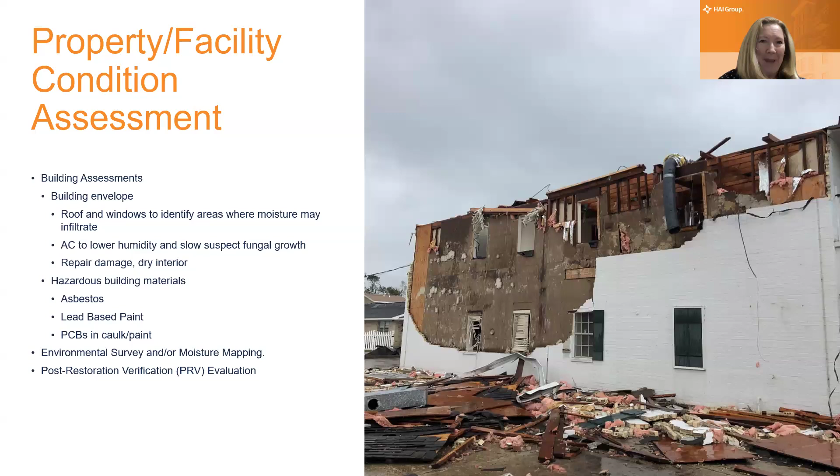So if we could go to the next slide, let's talk a little bit about what we're looking for. So in our building condition assessment or our facility condition assessment, we're first doing a visual assessment. We're going to walk through the whole building and observe. Again, we're looking for areas where perhaps moisture might be getting into the building. And this could be something that's just based on age, based on deterioration. It could also be due to a storm event, right? So we want to be cognizant of that. And perhaps we need to do a visual assessment after a significant storm event.

We've had an unprecedented hurricane season, for example, in Florida. So should your property be in the path of hurricane damage or high winds or some of these other types of environmental and storm related conditions, then you would want to do a visual assessment after the storm has passed and understand if there is any damage and if any repairs need to be made.

And so we would walk the exterior. We're looking for evidence of any ponding or standing water. We're looking for water that's accumulated at all. If it's getting close to the foundation, then we have concerns it might be infiltrating into the basement of the building, as an example. We'd want to look at any heavy vegetation growth.

Where I live, we have a lot of old trees, and so there's a concern, especially in storm events. These trees have come down, they've hit the roof, they've broken windows, those kinds of things. So we want to make sure we're cognizant of that. And if there's heavy vegetation around the foundation of the building, a lot of times, again, that traps moisture and starts to infiltrate into the basement and get into the building.

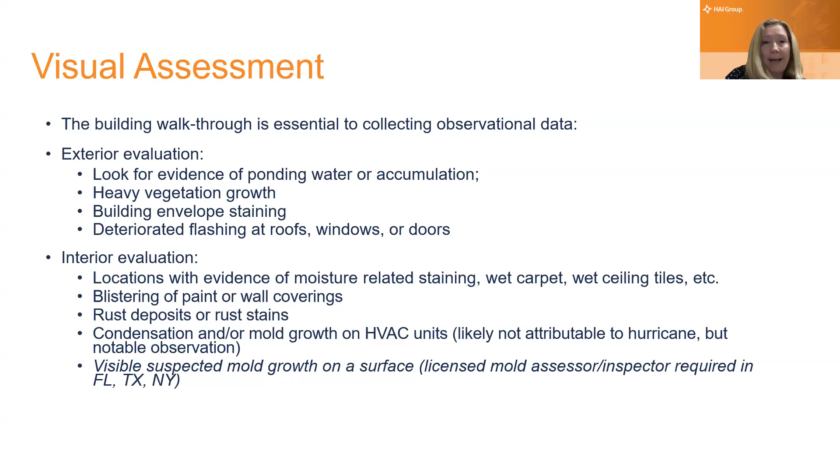And I just have a quick note here. Certain states do have specific licensure requirements, and we want to make sure that we're cognizant of that, and that if you're bringing in a specialty contractor, that they have the appropriate licensure. This would be another place for you to keep good documentation. You want to make sure that you have that information, and that is part of the report that they provide to you. You might ask for it as part of, say, a proposal, that you want evidence of the appropriate licensure. And similarly for asbestos-related work and lead paint work as well.

We know some commercial building owners set their HVAC equipment to cease operations, say overnight or weekend hours or something like that, maybe more so in an office setting or a manufacturing setting versus a residential setting. But that does happen. And so there might be different reasons why we change the HVAC equipment settings for different hours of the day. But also, more importantly, as we were talking about a moment ago, should there be a storm event, should we lose power, then our HVAC equipment is no longer working.

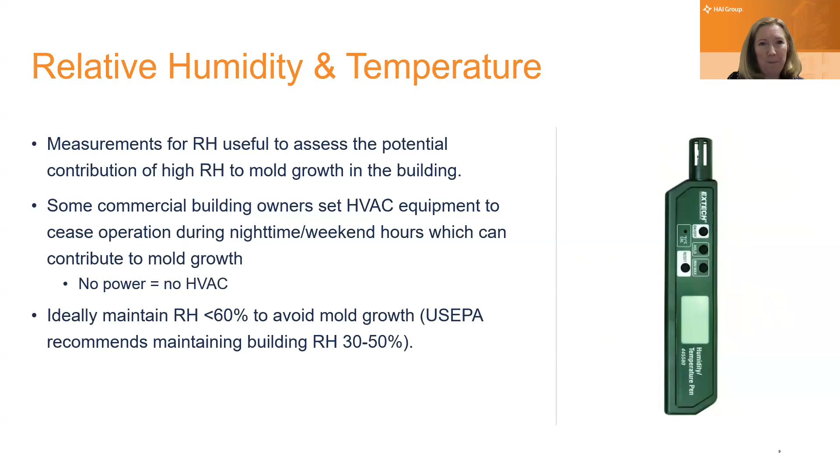Thank you so much. Another handheld device that we use is a moisture meter. Sometimes you'll hear it called a wood moisture equivalent or material specific meter. And this is a way for us, again, to look at the interior building materials and say, are the building materials soaking up moisture that they're collecting from the air, from storm events, that kind of thing.

So a lot of times, facility maintenance staff might have and operate one of these handheld devices, keep it on hand and utilize it if there's been a storm event, if there's been a power outage, if there's been a reason to think that maybe the HVAC isn't performing optimally.

So they're all a little bit different, but they essentially are looking to help us gauge moisture in building materials. And so you might need to calibrate it before you use it. They come with pretty easy to follow instructions. But the idea is to separate out any moisture in wood products where we know it can grow, but then also other materials, for example, like wallboard, the surfacing material that's so common in many of our apartments.

There's different ways to use this, but it's a quick survey, a quick gauge to give us an indication of what's the moisture condition beneath that immediate surface of the building materials. And it can be very precise, and we can make it specific to our area. And so we'll talk in a minute about how we gather this data, and then we put it in our moisture map.

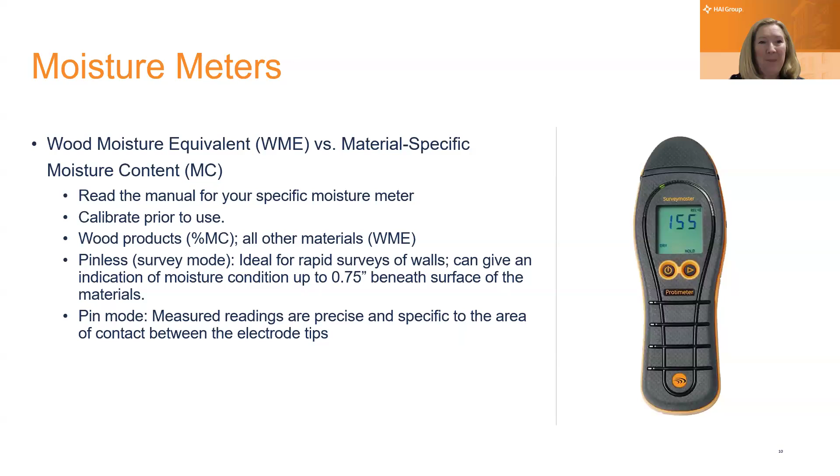We could go to the next slide, please. Great. So here's our moisture map. So we want to determine how far water has spread both horizontally and vertically, and to what extent those materials are wet. To what degree are they holding moisture?

It is a good visual tool for the client, whoever we're trying to convey this information to. At least I know in my house, I have a couple of visual learners. It makes a big difference, I think, to be able to see the representation. How far has this water spread throughout the building, horizontally, vertically? So on the floor, up the walls, maybe coming in from the roof, down the walls. Maybe if a pipe has burst, it's following the trail of that pipe throughout the building.

So we want to use that visual tool, and then gathering all this information, this moisture map can be used as part of a remediation plan should there need to be building materials that are removed from the property and properly disposed and then replaced. So it's, again, a great visual tool, and it helps us look at those building materials and to calculate and establish a remediation plan and the costs associated with doing that work.

Your floor plan could be hand-drawn. It doesn't have to be fancy. I'm going to show you a quick example of a CAD digitized version, but certainly it can be a sketch of the property, whatever's going to work for you, just to convey how far vertically and horizontally that moisture has spread throughout the building.

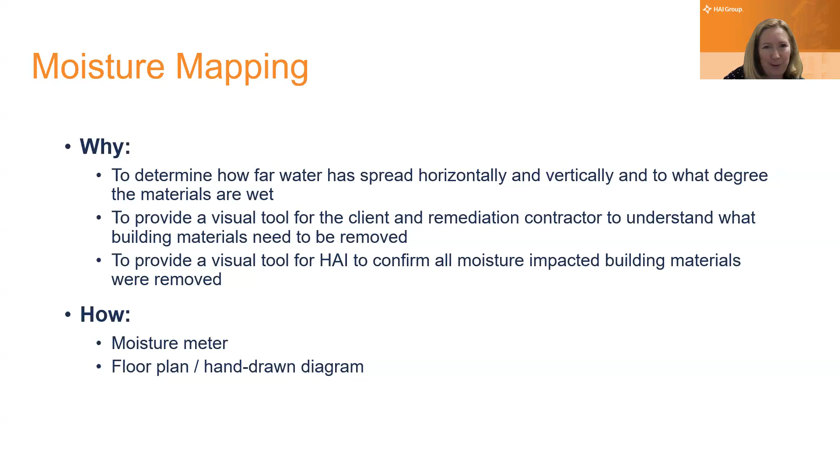Next slide, please. Great. So again, oftentimes this moisture intrusion is due to envelope leaks, as we talked about at the beginning. Is it coming in through the roof, through the windows, through the doorways, but also, again, from storm events. If it's a wind-driven rain, then we might see it start to come through exterior surfaces of the wall. So we want to be sensitive to that, if there's actual structural damage to the wall, or if maybe the flashing was not correctly installed.

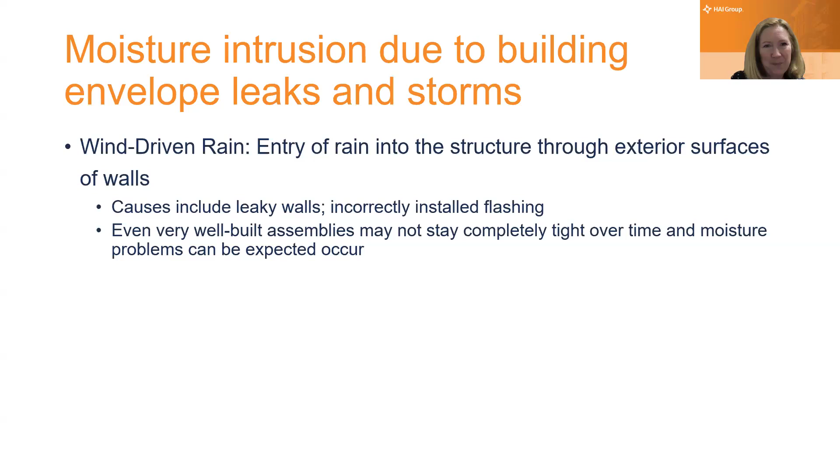Next slide, please. So let's just do a broad background. Again, I know we have a broad audience here, so I want to touch on some more things related to mold, as well as asbestos-containing building materials and lead paint, and give you some visuals of the kind of things that we'd be looking for.

So more about mold, we know that mold spores are ubiquitous. They're found indoors, they're found outdoors. Sometimes you'll hear people refer to it as a fungus. The exposure to mold is unavoidable because, of course, it's a natural process. But to the extent possible in a residential setting, in a multifamily setting, we want to try to minimize human exposure where we can to mold. And although we know that they're present outdoors and indoors, on the interior surfaces we have more concern about that. And so there's lots of different standards and guidelines that we can use, but there's no regulatory standard for mold exposure.

I personally am a very allergic person to mold. So if I walk into a building, I almost immediately react. My eyes water. I start to feel that itchy, scratchy throat, allergic feeling. But other people don't. And so that's also something that's a little bit tricky, that different people respond differently to mold growth. I feel it right away, but other people don't. So I guess that's maybe part of the reason why we don't have a regulatory standard, but we do use ANSI guidelines and others.

We just want to be careful where we can to minimize it. We know we can't eliminate all of it. It certainly grows sometimes in our bathrooms, below the kitchen sink, that kind of thing. But to the extent possible, we want to try to minimize it and mitigate it. If it gets out of control, if it's a proliferation of mold growth, then we really know we have a bigger issue, a bigger concern.

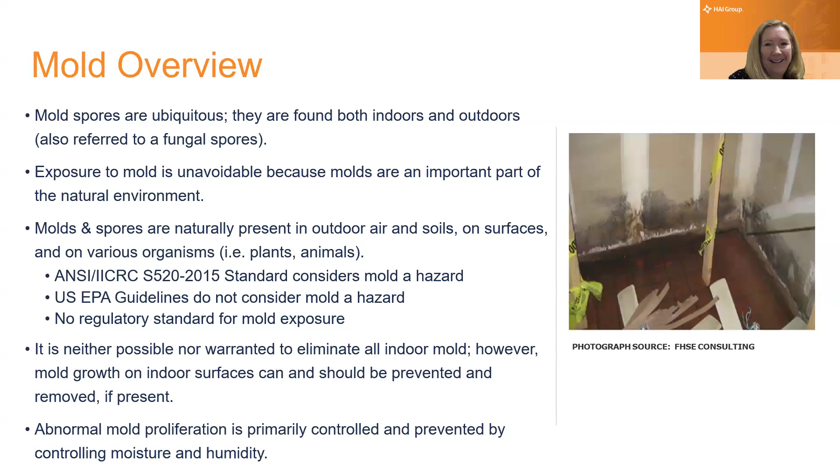Next. Great. Let's talk a little bit about asbestos-containing materials. Asbestos is a fibrous material. It occurs naturally in many parts of the world. And for a very long period of time, it was considered a wonder material. It has properties that make it very favorable, such as on building exteriors as roofing shingles and exterior cladding shingles. It's very durable. Those fibers don't burn. So there's lots of reasons why asbestos was used so broadly in so many capacities.

Some of you may be familiar, for example, with transite pipe. It was a very durable way to transport water and other solutions through piping that would last seemingly forever. So it has a lot of intrinsic value.

The problem is, although it's got all this value in decorative finishes, in ceiling tiles, added to paints, the exterior shingles that we talked about a second ago, really durable floor tile that can take a lot of use, say in a commercial kitchen or in a residential setting with a lot of tenants, it has the health effects that we'll talk about in just a second.

And so because of those health concerns, only licensed professionals can collect samples for asbestos. So this would be another area where I would say, if you're having someone come in, you want to make sure that you verify that they have the appropriate licensure to do sampling and abatement.

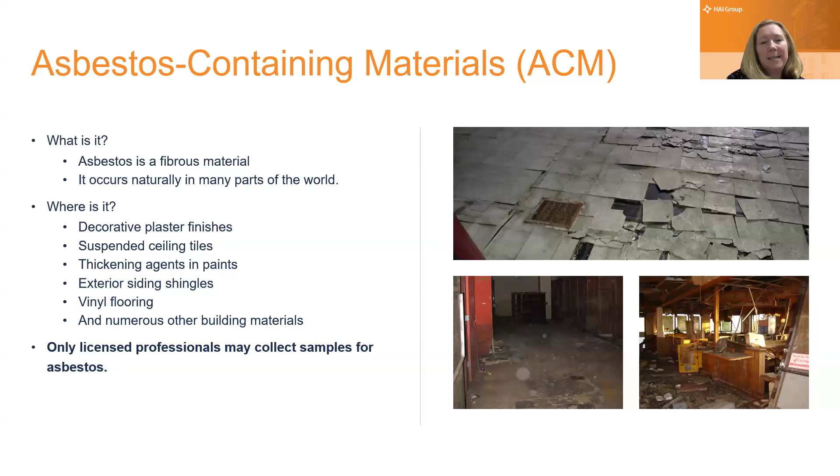And these are just, again, a couple of visual examples of the types of materials. You might also see it as pipe wrap, for example, in a boiler room. Again, it's a great insulating material. It's a wonder material, but it does cause, unfortunately, health effects.

Great. Can we talk for a minute about lead paint? I think it's really important, again, especially in a multifamily setting where we have children. It's our understanding from HUD data that over 62,000 units nationwide need lead abatement, meaning lead paint is known to be present. And so that's a pretty significant number. Related to that, we know that means that more than 90,000 children who are in Section 8 housing have been exposed and have lead poisoning.

And so unfortunately, we feel that more guidance is needed. The jurisdictions maybe need more lead abatement grants. We know the public housing authorities maybe aren't catching this or identifying it and able to eliminate lead hazards. So the first step is definitely awareness.

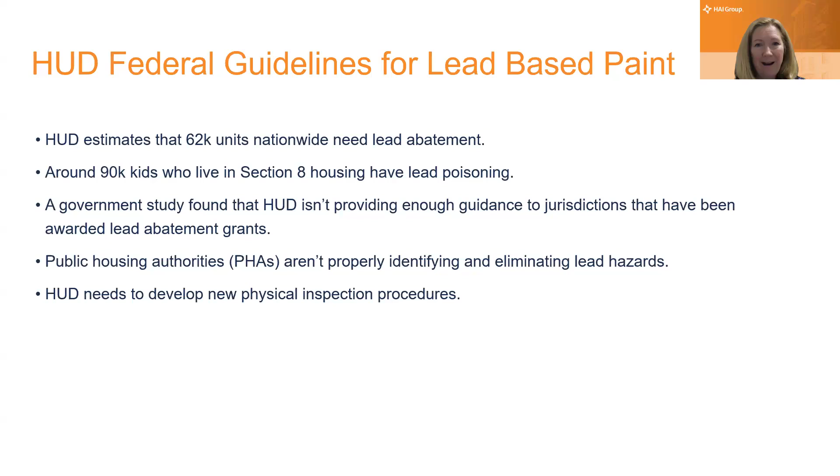And then following some of the steps we've been talking about today, really getting that visual assessment, having someone who is licensed to do lead-based paint sampling come in, and then develop an appropriate physical inspection procedure that's going to work, and then once it's identified, have it properly abated. And again, it needs to be abated by someone with the appropriate licensure, which varies from state to state.

So again, we want to be very careful about lead paint handling. We know that even lead dust causes some of the most hazardous exposure for children. And so that's a big concern. A common example is when lead paint was applied to windows and the sash around the window. And then when the windows are used frequently, that friction creates lead dust. And so it's very easily exposed to children as a respiratory issue.

And what's terrible about it is that it causes these terrible adverse effects, such as brain damage, damage to our central nervous system. It can even cause slowed growth and development. And oftentimes, I think what brings it to the forefront is learning and behavioral problems. That's sometimes how it manifests most commonly, where it starts to get identified and people start to realize there's a problem. So we really want to be sensitive to lead paint handling.

And so good best management practices for lead paint would mean conducting regular inspections, conducting a risk assessment, making sure if there is identified lead, that it's disclosed to the tenants at the property, that they are aware. And then having proper oversight for lead paint abatement. Again, it should be part of timely and routine visual assessments. There should be abatement that's conducted in the appropriate manner. There's steps that need to be taken.

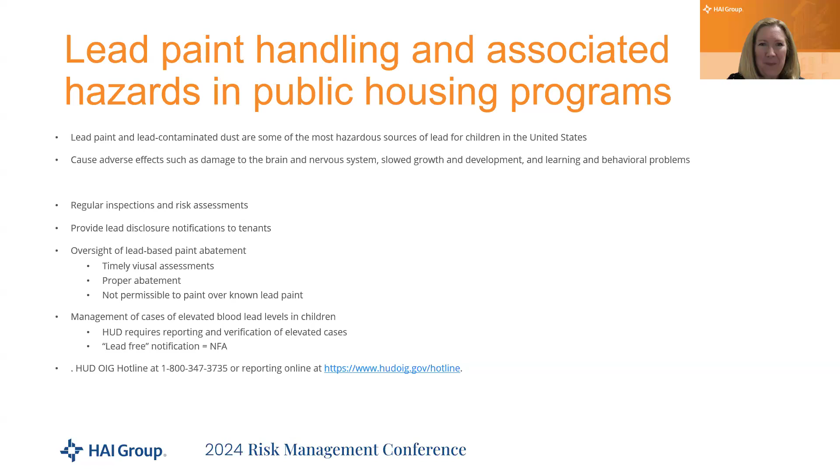Actually, Elizabeth, if you could, we do have a question regarding the statistics that you did mention in there around the lead-based paint. So if you could provide some of your sources for that, that would be great as well, and we can get those sent out to everybody. Absolutely. I would be happy to provide that. Thank you, Elizabeth. And there are a couple of resource materials at the end of the slide deck, so I'll be sure to get those out to you as well.

Absolutely. I know our time is drawing short quickly, so I just want to make sure we cover review and reporting. As we've been talking about this afternoon, having a good visual of where the moisture infiltration is, again, whether it's wet carpet and the flooring, whether it's the wallboard, this is just an example, but having a schematic, some kind of visual representation, and then demarcating any abatement that needs to be done, any impacted building material that needs to be removed. We want to make sure that we're clear about that.

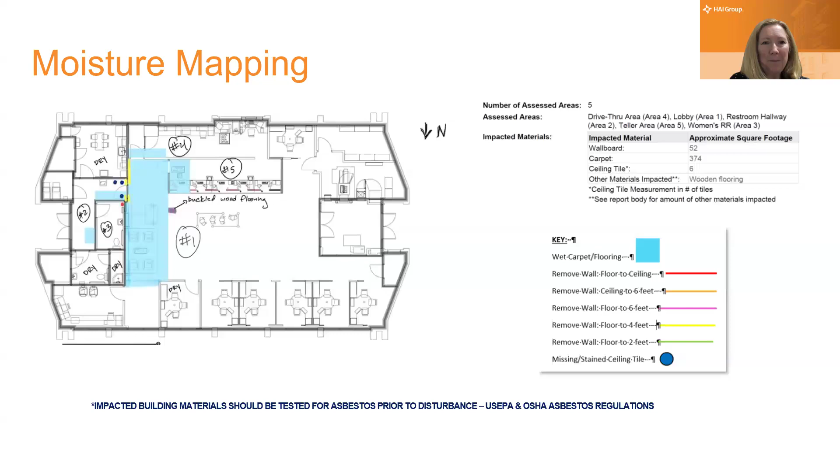We would follow a very similar process for not just moisture and mold, but also for asbestos, for also lead paint, right? So good documentation, have a good figure of the property, each unit, each floor, however it's appropriate in your setting to track this, but having good documentation is really imperative. Maybe the next slide we could go to.

Great. So just as an example, if you had an environmental consultant such as myself, or someone on your facilities team, they might generate a report that focuses on different areas of the building. I think it's incredibly powerful to have photo documentation, and this is really helpful as part of the overall documentation to be able to say, here's where we were before and here's where we are after. It's really helpful to be able to say, these are the steps that we've taken to identify our concern. This is the abatement that needed to occur. We've performed the abatement, and here's the documentation showing that the work has been done. So that can be very, very powerful to have those visuals.

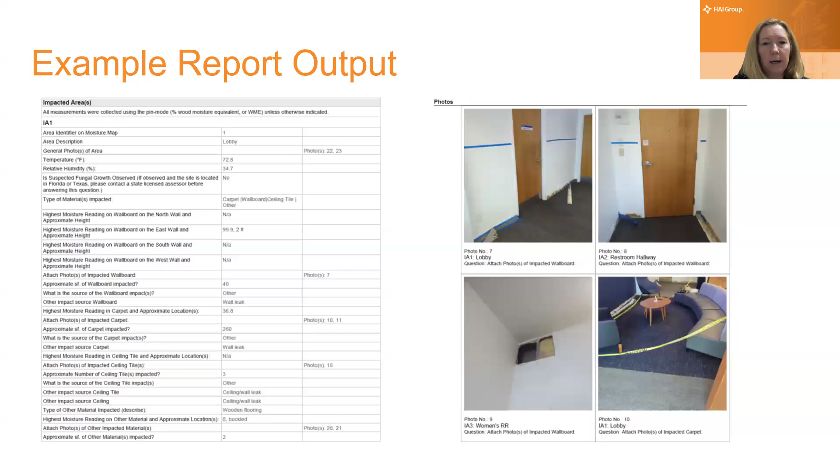And so just to point out, if you can see the blue lines, that blue tape, that demarcates the water level in the building. And so all of the wallboard below that level needed to be replaced in this example. So helpful, once again, to have good documentation. That really is valuable. Next slide.

We do actually have one question, and it's regarding the requirements for lead paint mitigation. They're stating that painting over as abatement has been a practice for many housing authorities. Please let us know where this requirement is coming from. And I don't think they have updated the requirement. I think you're just stating that painting over it has not been identified as clearly the best mitigation that we can be doing, because it does lend itself to having to be inspected all the time and constantly repaired. So I think you weren't stating that HUD has declared a regulation, just that it is more of a best practice to remediate, although it can be very costly.

Thank you. Yes, exactly, Elizabeth. I should have been more clear about that. Thank you for saying that. Absolutely. Yeah, I wanted to try to share with you some best practices, and you're exactly right. So while we might have done that in the past, especially with the friable dust that comes from asbestos, that comes from lead paint, and moving the windows up and down and up and down, if we add those extra layers of paint, it doesn't really solve our problem. So, thank you for clarifying that.